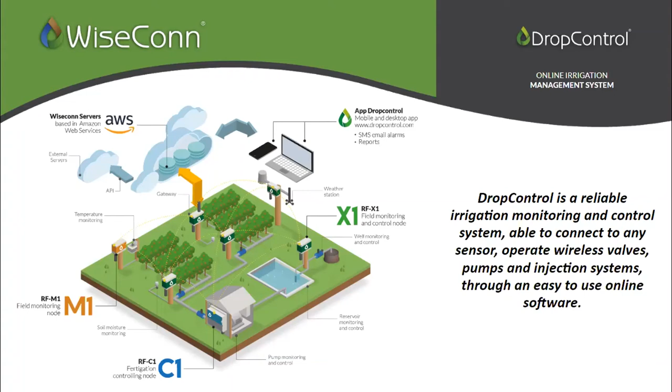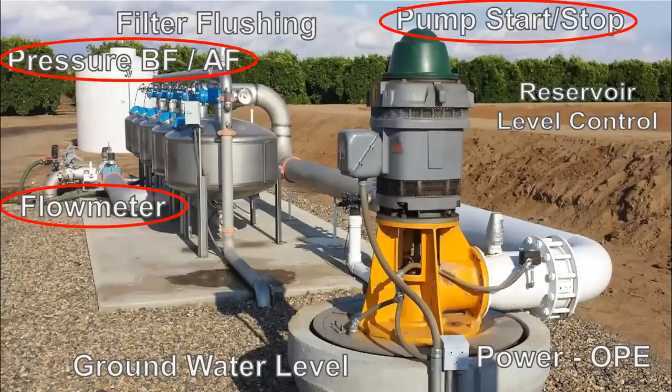So DropControl is configured of both hardware and software. Our hardware or our nodes are the C1, the X1, and the M1. The M1 is a monitoring node only. It's just a data logger, collects data information, sends it to the cloud. Then we have the C1, which is a pump filter station controller. Has 10 inputs, 10 outputs. For instance, if you have multiple filter stations with boosters, you can start and stop maybe 3 boosters, a couple acid pumps, a couple fertigation pumps, read all the flow meters and read transducers as well.

And then in the middle is the X1. This is our flagship node. It's a monitoring and control device. Has plug and play expansion cards, which I'll get into, but it's the most unique and the most advanced that we have to offer at the moment.

So the RF-X1 node, it's extremely flexible. Tell you a little about it. It's a bidirectional node. So it's a data logger and a controller, like I said. Has radio mesh network enabled. We run a 900 megahertz radio, communicates with each node. Has 2 miles line of sight. We run expansion boards, which I'll get into in a bit as well.

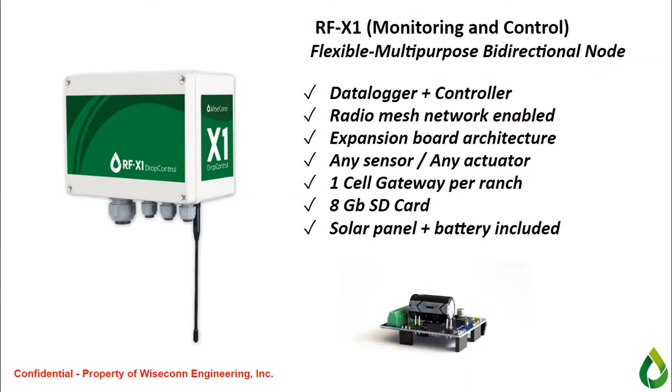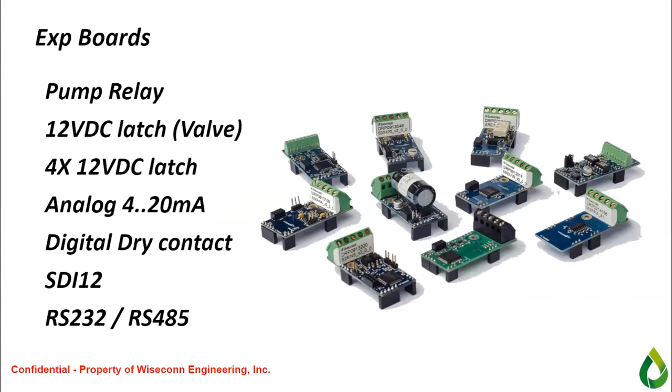There's also an 8 gig SD card in the back, so if anything does go down, for instance, an AT&T cell tower goes down, no matter what, the nodes are still collecting data. With this package, you also get a solar panel and a lithium-ion battery included. So the expansion boards, like I said, they're plug and play, kind of like a Lego. We have pump relays that start and stop the pump, 12 volt DC latching for your 12 volt solenoids, 4-20s, digital dry inputs, SDI-12s to read different soil moisture sensors, and then RS-232 and 485 for other sensors.

So some of the accessories, which I already got into: weather stations, local weather stations we can tie into, or we also give the grower, every grower gets a free CIMIS weather station. We're tied into it through an API. Soil moisture sensors, flow meters, we read pH and EC, ground level water, pump control, VFDs, dendrometers, fertigations, pressure, and then you have your latching solenoids that kick on and off the valve.

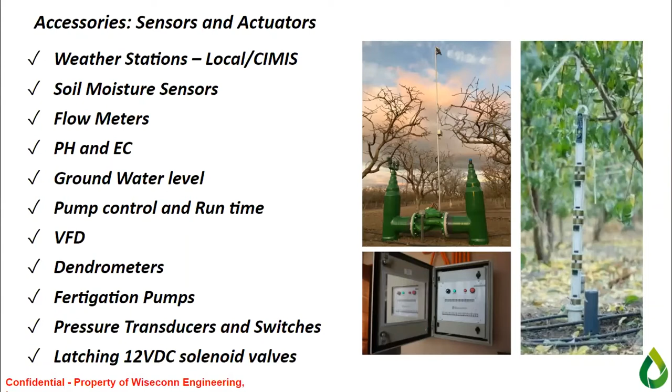And then last, second segment is going to be our software, which is DropControl. You can go to dropcontrol.com. We also have a mobile app, which is Android and iOS based. DropControl is a software and it is a service. We do have subscription fees. We also do have a free platform, which is WiseConn Open Service. It's limited. It's not the greatest. It depends on what applications you're using it for, but it possibly might work for you.

But yeah, from there, I believe Daryl a little later is going to get into it. You're going to go over the app. Okay, and take it from there.

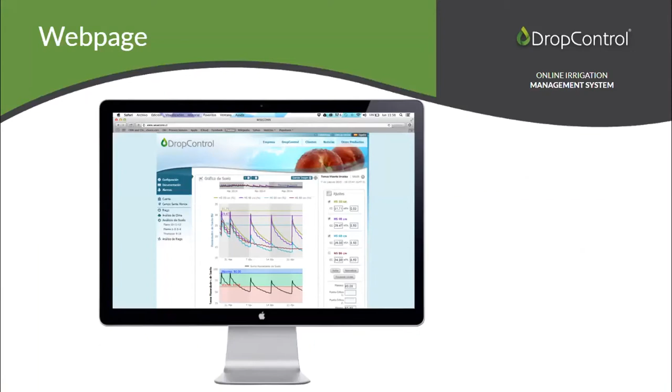So, all right, I'm Daryl, I'm marketing and customer experience specialist. And what I'm going to do right now is go over the DropControl web page and the online software. So this is the online irrigation management system. This is the first screen that growers will usually see. We'll have a whole layout of stuff that they're going to be able to view, like the farm information, their certain block name, which is totally customizable. It's all up to them.

What we can see in the field right now, if we're all looking at that map, is we're getting a map from Google Earth Pro. So it's basically a KMZ file that we have to map out different areas. We can do it per variety, increase efficiencies for variable rate irrigations, stuff like that. The map is totally customizable, especially during different soil types. Right here, you can see a map that has all of our nodes in the field. And all of those nodes have a centralized gateway.

So if everyone can see my mouse cursor, this one stands out from the others because it has a different icon. What that means with the two prongs here is this node is the cellular gateway for that entire ranch. So we can click on these nodes. You can see the battery level, if they have good signal, and you can also see what's attached to them. So you can see if one's reading a soil moisture probe or a pressure transducer, as well as what it's controlling or monitoring.

And then on the left here, we have different things that we can look at. We can schedule irrigations. We can look at our weather, our soil moisture, as well as other irrigation aspects like current pressures, flow rates, pressure before and after the filter. We can also see pressure switches that open and close during irrigations. And then we have custom charts, which basically lets you take any aspect in DropControl and compare it to others.

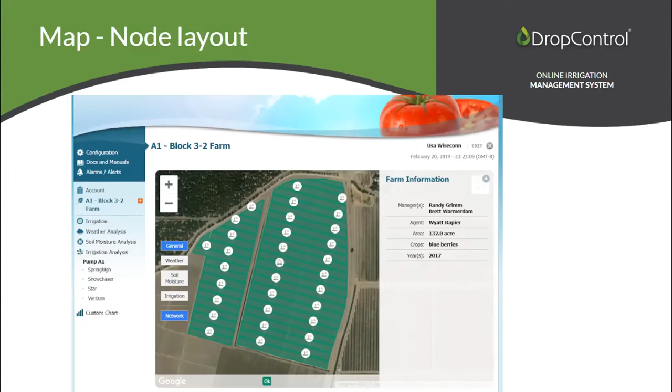So with scheduling, it's fairly simple. We've got a couple different ways you can schedule. You can do it by the end date and time. So I can go on here and click my calendar button that's right here. I can click the calendar button, enter a time, and then choose a date. Say I want to run for 8 hours, 0 minutes. For a duration, that's totally fine.

So you can go end date and time, select the date, or you can do by duration, which is what we have here. Clicked on duration. All we did was click the certain date, click a start time, put in how many hours we want to run, and then this is what's giving you the end date time.

Similar to with fertigation, if you want to do a proportional injection, or let's say you just need to put 500 gallons out, it's going to calculate how much is going to go across all of the different blocks if we're going to do proportional injections.

With pH control, we can tie into different pH sensors that are actually in the field and be able to take a reading from the line and irrigate to a set point. We also have pre-irrigation time and post-irrigation time where we can clean out the lines before and after we have the acid injector.

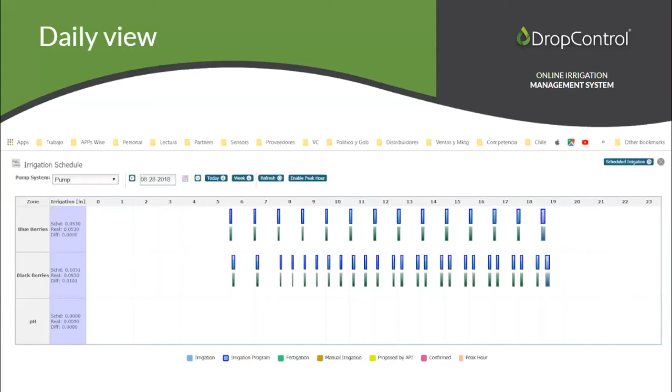So we've got a couple of different ways to make sure everything's running. We can check by the flow. We can make sure flow's going. Check by pressure switches. We can see the valve is open and closed. And we can see by pressure transducers at the filter station that we've got some pressure and some activity at the filter station. This is a daily view, so it's all those shots throughout the day. So on the weekly view, I can see, okay, so this is what's happening these days.

We also have, like I said, that operation feedback. So you can see the start time and what actually happened at the bottom. We're clicked on the bottom block right now, the bottom blue block. We have a 5-hour irrigation, it looks like. The irrigation type is automatic. Status, it was executed fine.

The volumetric difference, so we scheduled it at 0.2217, and what actually happened in the field was 0.20. So we're actually getting a little bit less than what we had calculated. The nominal flow or the scheduled flow, which is what the dealer gave us about the flow meter, was that we're pushing out 1,200 gallons per minute. But in the field, we actually saw we were pushing out 1,100. So there's a flow difference of about 8.11%.

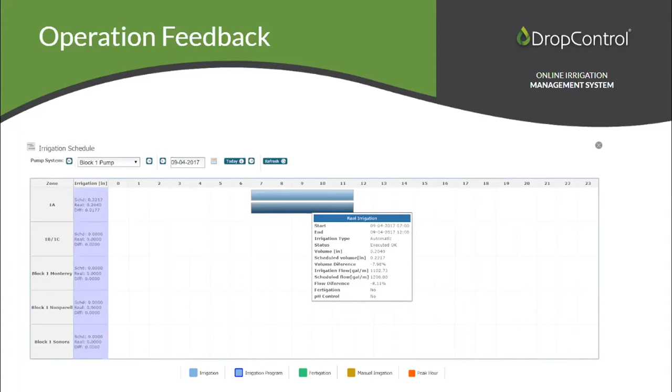We can also adjust around SoCal Edison and PG&E peak hours. So we can enable those, and you'd be able to schedule around peak hours, just as you're seeing here. And to go back to my pressure switch monitoring section, those gold bars under here where it says manual irrigation, that's what this is. So the pressure switch is noticing that valve 1 is irrigating, and the monitor section to make sure it's irrigating is also going off. So we can see that we irrigated through here and it was successful.

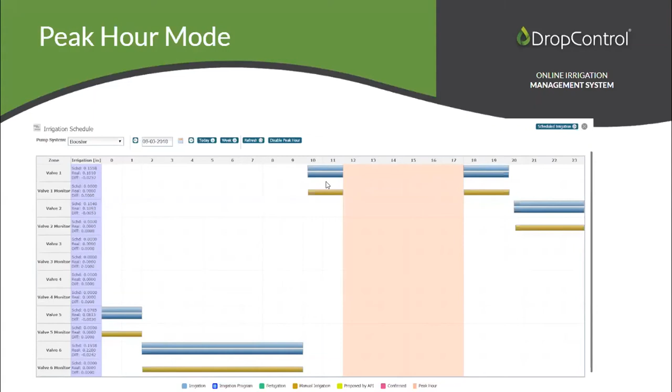Another thing we can do is look at some flow readings as well as accumulated volume. So we're looking at the weekly accumulated volume and then the accumulated volume per acre in acre feet throughout the whole season. So we can see that line is slowly increasing. We're totalizing our acre feet, as well as seeing what's happening for every week that we're irrigating. And those are coinciding with flow.

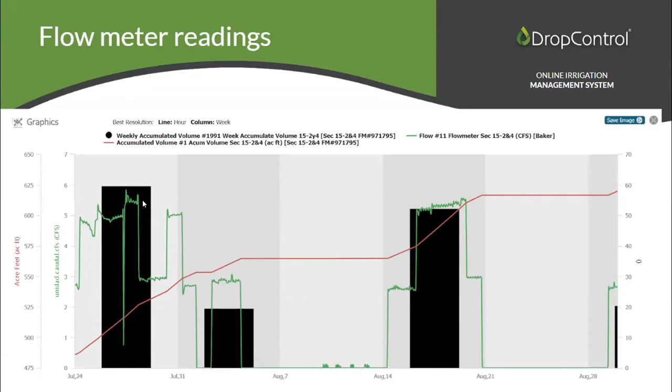Here we can see pressure throughout the system. So you can see different pressures while your system's running. You can see these drops. Usually with those drops, we can see pound of loss, which is going to directly correlate with flushes. There might also be some anomalies in there. You can look and see, why did it take so long for me to flush until here, or why was I flushing so much? This is a nice tool that you can use to look at your system and see if there's any improvements or any fixes that you might need on the filter station.

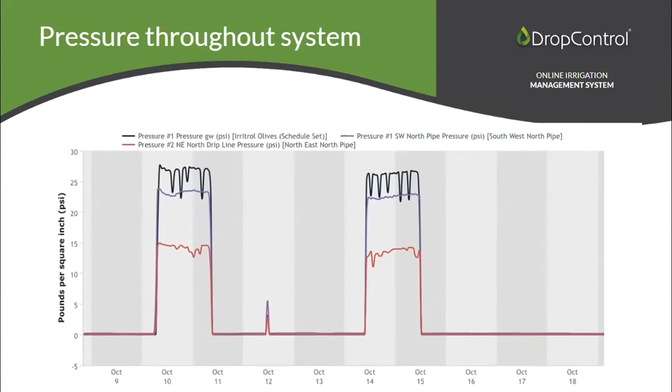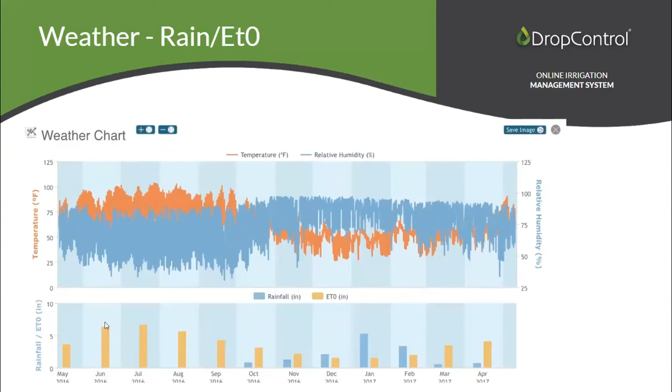Another example of our weather for frost protection. We can set up alerts in DropControl that alert you when your temperature gets down to a certain area, and then you'll have to go out and kick the pump on if you want to prevent any frost. So we just set a simple alert. You say, at a temperature of 35 degrees, I want a text message, a robocall, or an email sent directly to me so I can go out and start my pump.

We've even seen ag tech go more towards the autonomous side of irrigations, where we're getting that alert at 35 degrees and then sending a signal to the pump and kicking it on. That's possible, but that has to be done internally, since that is such an autonomous thing with irrigation systems. Sometimes it's kind of hard to trust the automation, but it does prove efficient and will save you a lot of time and a lot of stress.

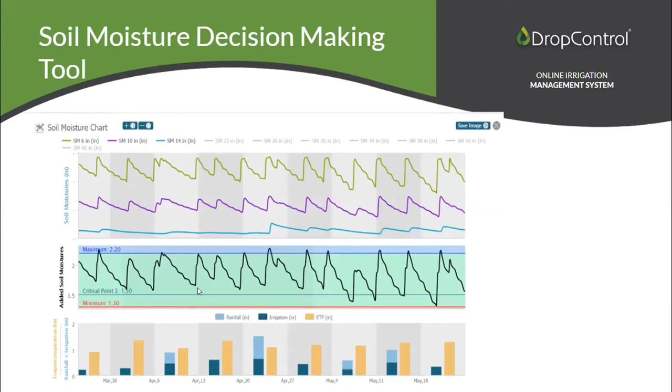So like we were saying earlier about the soil moisture, I can get an alert that I don't want the soil moisture to go below this point right here. So it'll send you an alert that you have to go out, kick your irrigation on, and make sure you don't get below this critical point.

That one node can control a couple different valves. One node in our field, technically fully loaded, can control 9 different valves off an X1. That's in the field. At the pump station, we can do about 60 with that C1, which is our larger node, and it has different attachments onto it where it can control a whole bunch of different stuff.

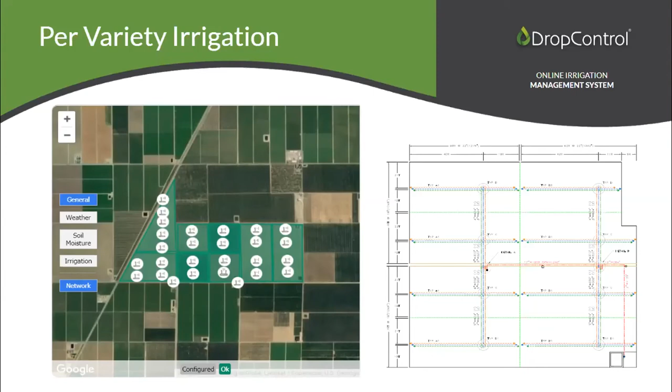But yeah, right here in the field, we can control valves and make sure we are opening and closing valves for different varieties, you know, longer sets on one side, shorter sets on the other, kind of whatever the grower wants to do, it's up to them.

So this is just an example of a high frequency irrigation. This guy's name is Tom Rogers. He has about 170 acres of almonds in Chowchilla. He's irrigating 10 times a day, 20 minutes, about 3,000 pounds averaging. No irrigator, you know, did everything himself.

There was no ponding, no runoff, and he was also spraying while he was irrigating. Right below you can see his irrigation schedule. So that's kind of what that pulse irrigation or high frequency irrigation is going to look like.

So the ROI average is 1 to 2 years, he saw his increase in yield between 5 and 10%, but the water savings was at the 30% level. He also lost a well the one year that we helped him, and he still was able to save that 30% of water. So that kind of goes to show that running these high frequency irrigations, and basing that off of the soil moisture, you're going to get a more efficient crop and a more efficient use out of your system.

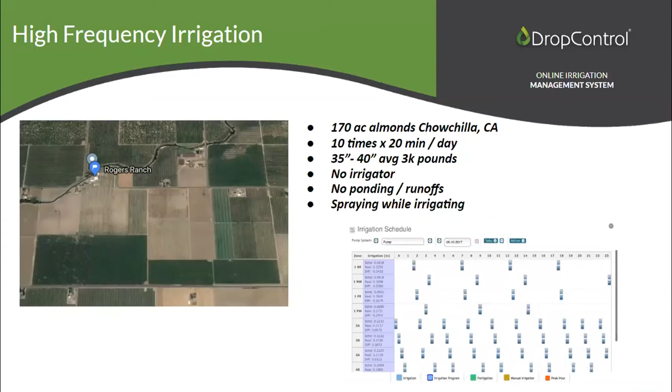Another one we can see is Flores Farms out in Lemoore. So 850 acres of pistachios, irrigating 3 times a day, a little bit less than the last case, but still averaging around 3,000 pounds. In his off year, he actually saw a 38% increase and a 15% water savings goal. He was able to meet that.

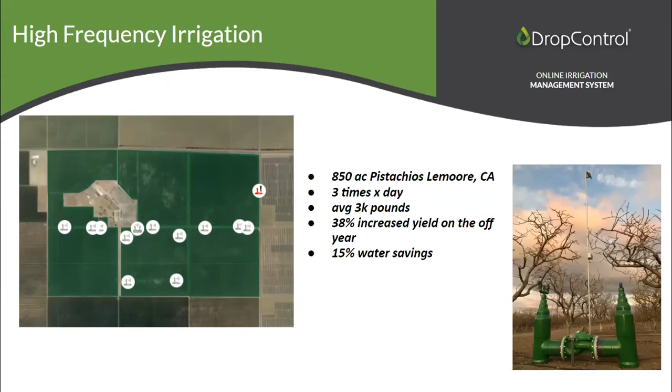Automatic demand response. So it's incentive money for basically investing in your automation. You get rebates on the energy bill for the participation in that program. And it's also an investment in the pump and automation, soil plant sensors. It's a fixed number of events, you know, length and occurrence depend on the certain day.

We actually had something today go on where demand response was taking place, and we had to adjust the schedule in DropControl so that we could work around that. So they could shut the pumps off and then kick them back on once PG&E gives them the signal that they're good.

And then on-bill financing is another thing with PG&E, they have a lot of resources on their webpage. They'll give a 0% interest loan for 0% down for 5 years. Then we have another thing that's SWEEP by the CDFA.

So it's paying for automation, solar, a lot of flood to drip conversions, a lot of telemetry, so installing soil moisture probes. Being able to check off all of these points, so automation, solar, flood to drip, telemetry, that's going to increase your ability to get approved and get awarded those, especially for the diesel conversions to electric horsepower pumps.

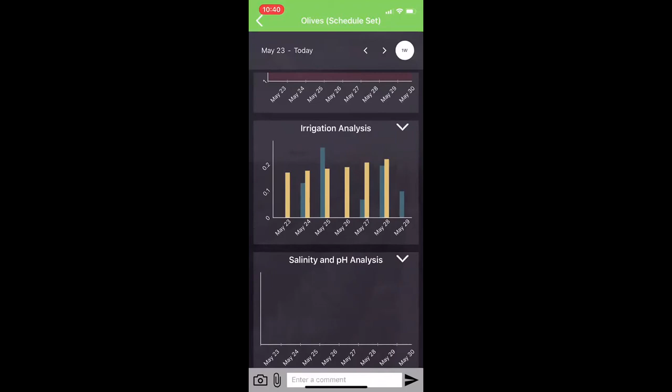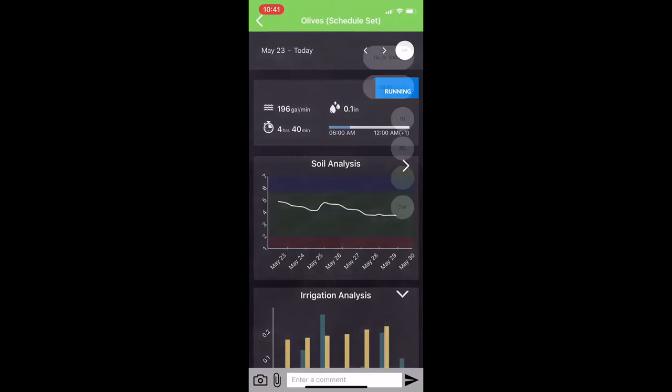If we wanted to change how much we're looking at here, we can go from 1 week, 3 days, 1 day, any custom day. You can go on the calendar and search variables or areas that you want to look through. I can go back and click 2 weeks. And now I'm able to see a little bit more data.

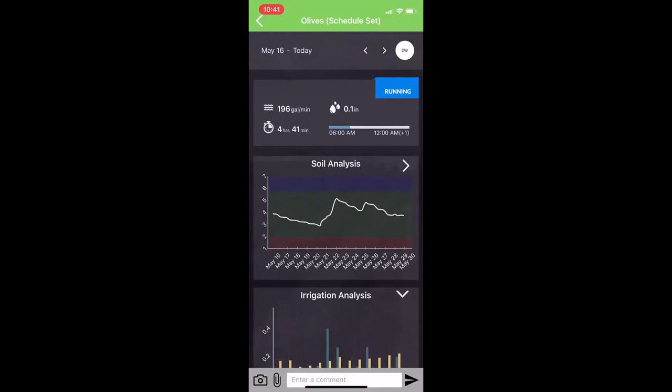I can also, from here, analyze the soil, but I'll show you how to do that on the soil analysis page. So click back, click X, okay, and then what's going on here? See zone 4, very wet. So how I was saying earlier, it's going to tell you if you're ponding, or if there's something going on in the field.

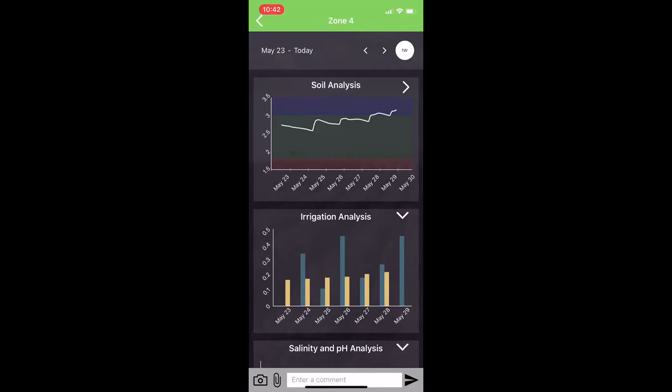We can see that the soil sensor is actually looking at a lot of overwatering. It could be that you ran the irrigation too long, or it could be that there's a probe problem. It'll usually tell you by that. So that's what that signal is giving us. So in the blue, we can see that we're on that line above, which is why it's telling us we're very wet in the field.

Zone 3, everything's going good. Weather station, everything's okay there. The weather station will also give us a heat warning. So once it gets above like 95 or so degrees, or whatever we have it set for out in the field, it'll tell us there's a heat warning.

We also have a connected devices tab. So the connected devices tab was created solely for the operation of that C1 controller. You can go up to the C1 and, without having any signal to the cloud or anything, you can activate the C1 using Bluetooth, operating multiple zones at the same time without having to really get out of the truck.

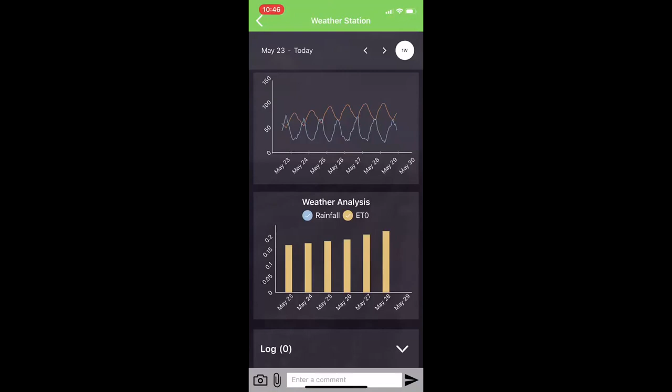Just like last time, you can go to 1 week, go to 2 weeks, and you can see a lot more data. So you can see really how much the temperature actually picked up within the last 2 weeks compared to the relative humidity. You can also hit this drop-down menu, and there you go. You have the temperature, speed, direction. We can also click these buttons off and on. So if I just want to look at temperature, I can see trends there. If I just want to see humidity, I can click off the temperature and just look at that.

Going back, we can go ahead and look at that soil moisture probe. Let's take a look from May 1st. Two weeks. From there, it's kind of customizable. You can see what's going on. You can pick any certain date that's out in the field, take a look at it, go to soil moisture analysis and click on the arrow next to it. Now we can really see a lot more stuff that's going on.

Fast forwarded it to this May 16th to today. Same thing, if we click the drop down menu, you can look at all the depths that you have. You can also turn off and on stuff. So I can look at 6 inches, and at 10 inches, I've definitely got more moisture there. 14, I've got a little bit less. 18, 22, 26. So we can really see that in the area between 10 inches and 22 inches, the water's all kind of staying towards that area, but also draining towards the end.

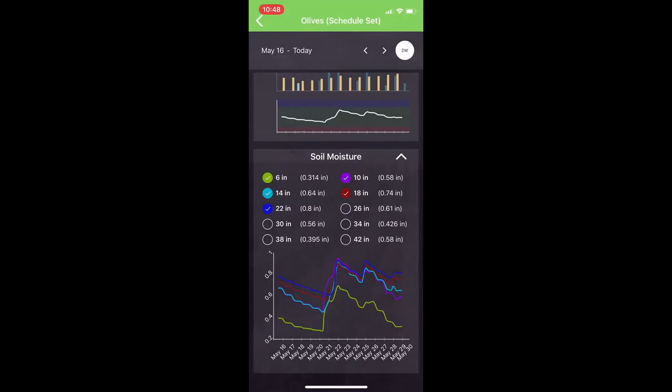So I pick this back up. You can skip, go back with these little arrows. You can see the 2 weeks prior, 2 weeks before that. Just a lot of different stuff that you can do with this little app.

You also have your notifications area. So you could go here, click on your notification settings. You can get a bunch of different notifications. You can get them for pressure spikes, low flow alarms, if the irrigation was not sent to the network. So irrigation not programmed, irrigation not started, irrigation alarms. If there was a power shortage, like PG&E shut the power off and the pump kicked off, you can definitely get an irrigation notification about that.

Pump system switch mode. So if it went from automated irrigation to manual irrigation, you can get that. Any DropControl news, so any updates that we're going to be able to release to our users, you can get those directly to your phone, as well as the sensor alerts. So you can get direct sensor alerts on your app, as well as to your email, text message, about anything that's going on in the field. So just like I was talking about before, how we saw that sensor staying within that critical point for the soil moisture, you're able to get different notifications for that certain block or that certain area.